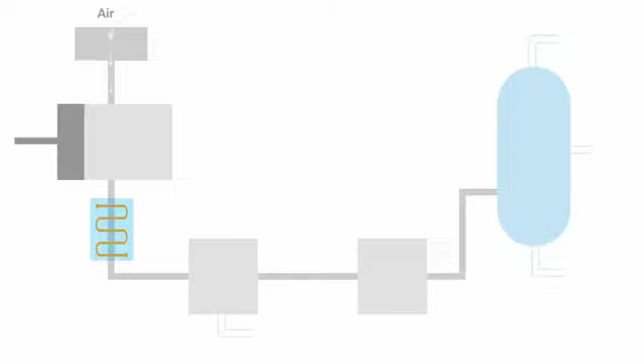In this video, we will learn how oxygen is made artificially, how it is stored and how it is transported. The whole process is like this. At first, air is sucked inside a compressor. There's a filter before that, so that there are no impurities like dust particles.

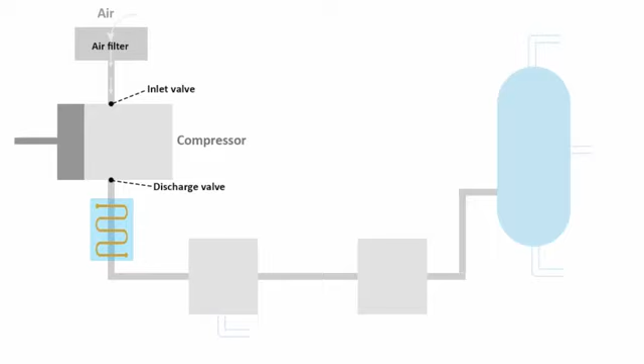If you look inside a compressor, there are two valves. The inlet valve sucks air in, and then with the help of a piston, the air is compressed to a very high pressure. The compressed air is then released through the discharge valve. One thing that you have to understand is that when air is compressed, it heats up.

Because when you pressurize a gas by compressing it into a container, you're putting all those molecules into a smaller volume of space, and you are adding potential energy by the compression. Then when you release that gas back to atmospheric pressure, that energy has to go somewhere. So it's given off in the form of heat. That means the air that is released through the discharge valve is warm air.

Now this warm compressed air needs to be cooled. For that, it is passed through a freezing unit. And that is done with the help of liquid nitrogen. Liquid nitrogen is very cold. It can freeze anything instantly. Here you have to understand that liquid nitrogen is not mixed with the compressed air.

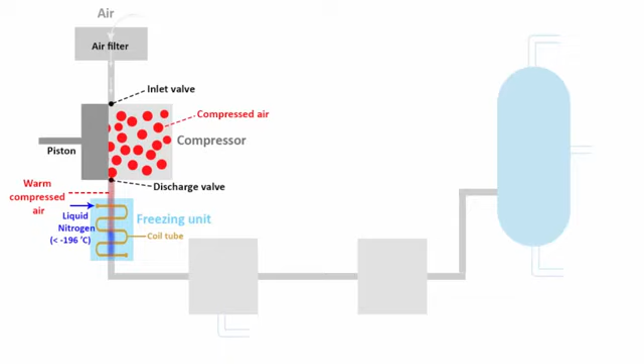Rather, the discharge pipe through which the compressed air flows out is covered with coil tubing. Liquid nitrogen is pumped into that coil tube, which is in direct touch with the discharge valve, through which compressed air is flowing out. After coming in touch with liquid nitrogen, the compressed air becomes cold. The temperature falls down up to -200 degrees Celsius.

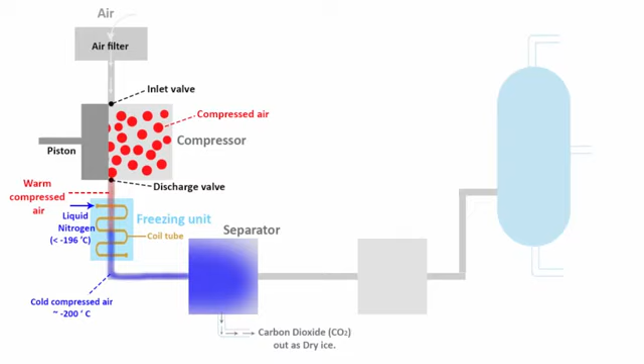The cold compressed air is then sent to a separator. Here carbon dioxide is separated as dry ice. The air that is now free from carbon dioxide is sent through an expansion turbine, where the air is allowed to expand. Here the air turns into liquid. It is called liquefied air. Its temperature is around -200 degrees Celsius.

In the end, liquid air is sent into an air distillation column, where it is slowly warmed up, because it then separates various components of air like nitrogen, argon, oxygen, etc. As you may know, air is a mixture of different gases. So in this air distillation column, different gases that are present in the air are separated by slowly warming up the liquefied air.

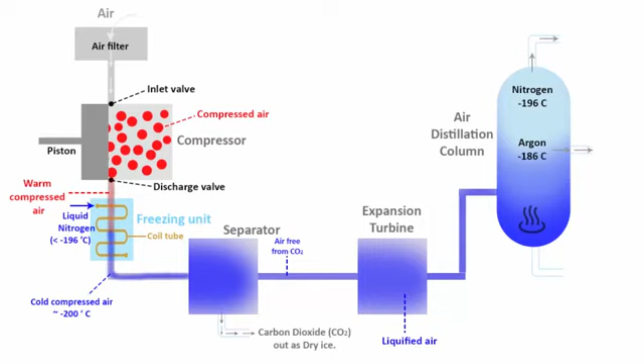Nitrogen gets separated first, because nitrogen boils around -196 degrees Celsius. After that, argon gets separated, because argon boils at -186 degrees Celsius. Oxygen, which has a higher boiling point, is left behind and is collected separately. Now please don't get confused, because -196 is much cooler than -186.

Oxygen boils around -182 to -185. So if you look at these three temperatures, obviously -185 is higher compared to the other two. That means oxygen has a higher boiling point. At the bottom of the air distillation column, you will see liquid oxygen settles down.

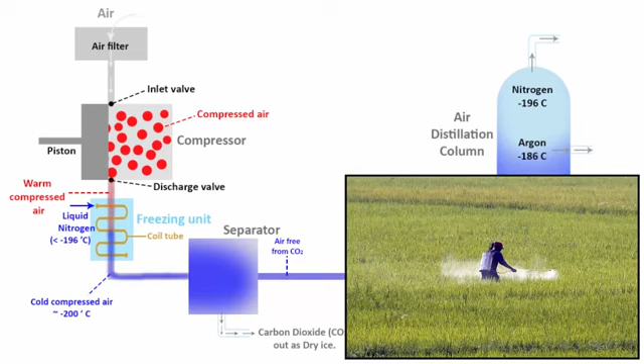Argon gas is sold for industrial use, particularly in the iron and steel industry, for welding and casting. Nitrogen gas is used to make fertilizers and in food packaging industries. So basically from this entire process, in the end you will get liquid oxygen. Liquid oxygen is then transported by filling it into special containers such as aluminum cylinders. If it is required in larger quantities, then cryogenic containers are used.

So always remember, oxygen for industrial use is delivered to customers in liquid form, and it is stored in cylinders and tanks at high pressure. It is said that the pressure at which liquid oxygen is stored in a container is up to 3000 psi or 200 bar. For those of you who don't know what 3000 psi is, psi is a unit of pressure expressed in pounds of force per square inch of area.

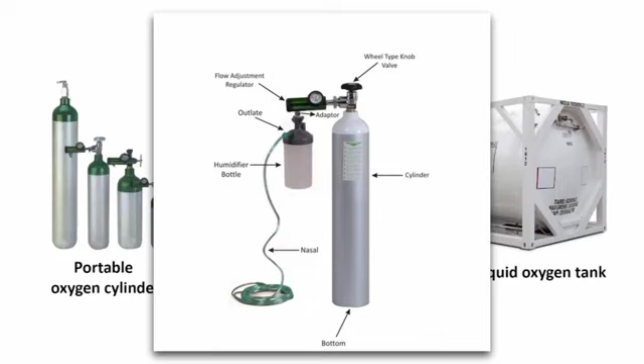In layman's terms, anything more than 1000 psi is a lot of pressure. When you give your car for cleaning, you will notice they clean your car with a high pressure water spray gun. With that much pressure, you can easily clean all the dirt from your car. Anyhow, liquid oxygen is stored in the cylinders at around 3000 psi. These cylinders come with a pressure regulator that allows you to set the output pressure. A patient in hospital needs around 50 psi, which allows slow supply of oxygen.

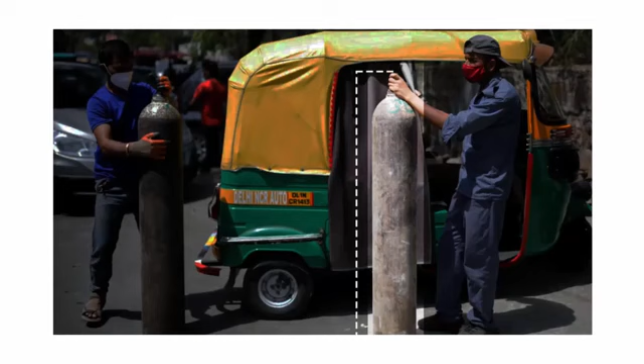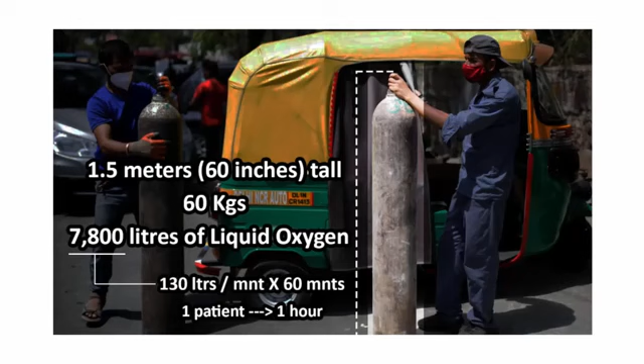Oxygen cylinders come in different sizes and can be pretty heavy. The largest size is around 1.5 meters tall and contains over 7,800 liters of liquid oxygen. Today, a patient in a hospital can require up to 130 liters of oxygen per minute. That means a large cylinder would last about an hour. Now, a cryogenic oxygen tank looks like this. They come in different capacities from 3016 liters to 61,620 liters.

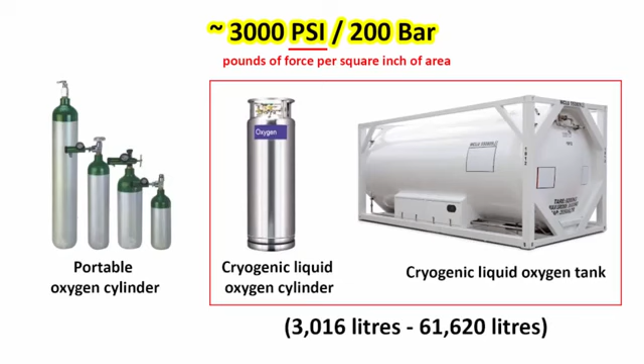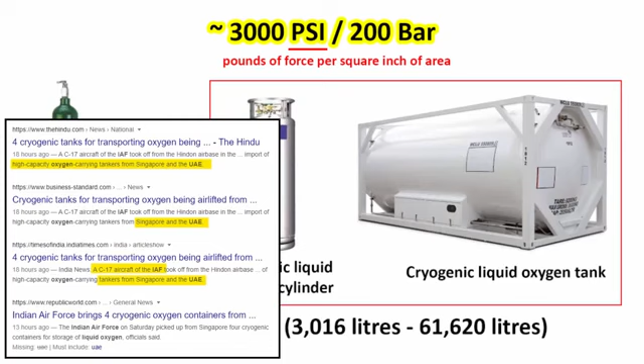The Indian Air Force has airlifted 4 cryogenic oxygen tanks from Singapore in C-17 aircraft. Apart from Singapore, India is also looking at lifting oxygen tankers from UAE. The reason these tanks are called cryogenic tanks is because the term cryogenic is used for anything that is produced or stored below the temperature of -150 degrees Celsius to absolute zero.

Absolute zero is referred to as minus 273 degrees Celsius. The reason it is called absolute zero is because no object in this world can be cooled below minus 273 degrees Celsius, because it is believed that there is no heat energy left in a substance below this temperature. As per the laws of thermodynamics, absolute zero cannot be reached.

Anyhow, the meaning of the word cryogenic is anything that is produced or stored below the temperature of minus 150. Since liquid oxygen is formed at minus 185 to minus 182, that is why these large oxygen tanks are named cryogenic oxygen tanks. I hope you found this video informative.